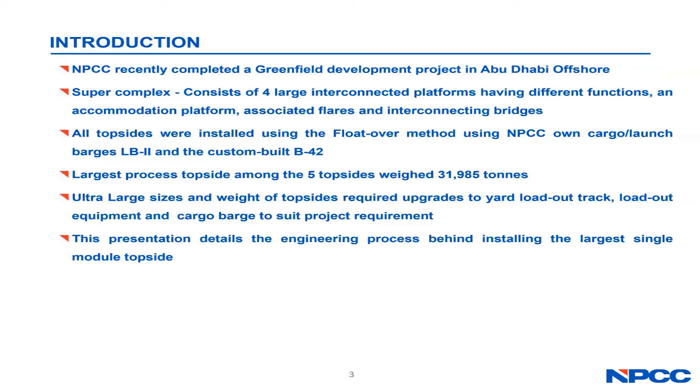Topside details. This process platform topside is an 8-legged structure. It consists of cellar deck, main deck, weather deck, and a cooler deck. Loadout weight of this topside was 31,985 tons, excluding approximately 1,350 tons of support structure, leading to a total moving weight of nearly 33,400 tons during the loadout operation. The size of this topside is approximately 72 meters in length, 81 meters in breadth, and 51 meters in height. This was fabricated at NPCC's yard in Musaffah, Abu Dhabi.

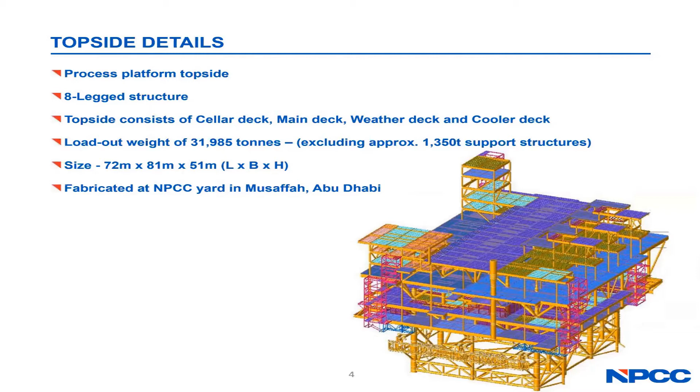Fabrication and loadout. From the early stages of the project, the fabrication location and orientation of the topside was decided. The jetty was dredged to accommodate the size of the new cargo barge with adequate underkeel clearance during loadout. The jetty was furnished with new larger bollards to take the loads of loadout and alongside mooring of the cargo barge. A new RCC skidway was designed and constructed to bear all the loads transferred from the topside during the loadout and weighing operation. These were covered by NPCC structural and civil engineering groups. A sketch of the pile arrangement along the skidway for taking the loads during construction and weighing operation is shown here.

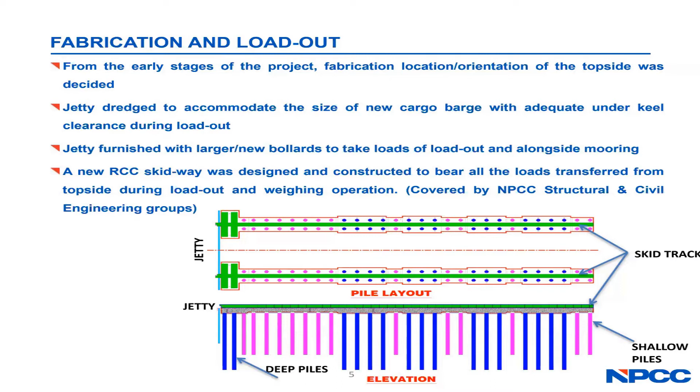Deck supporting aids. Topside is loaded out by skidding method. The topside is constructed on skid tracks that are laid in line with the RCC skidway and loaded out onto the barge along skid tracks that are laid in line with the bulkheads on the barge. Skid tracks are large stiffened I-beam sections laid on the yard and the barge, along which the topside moves. Topside is supported on 8 transportation nodes, resting on skid shoe structures that can slide on top of the skid tracks. Interconnecting trusses connect pairs of skid shoes to avoid misalignment during loadout movement. These are removed once the deck is loaded out and sea fastened on the cargo barge.

Design of all structures are covered by our structural engineering group. Skid track is designed on the cargo barge side, considering differential settlement and loads during transportation condition, to cover all critical scenarios.

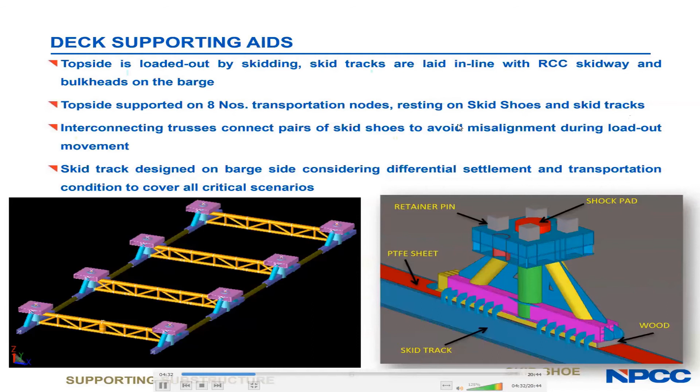Loadout. For the skidded loadout method, the topside is fabricated on a support system that rests on a skid track or rails and is pulled using a suitable mechanism along the skid tracks installed on the yard to that on the cargo barge. NPCC uses a gripper jack system for pulling the loads during skidded loadouts and has an inventory of gripper jacks of various capacities up to 800 tons, along with its hydraulic powering systems. Gripper jacks are hydraulic equipment that can move a load along a skid track by gripping onto the skid track and pushing or pulling using its hydraulic arms. Here we can see the gripper jack system being used to move a topside along the skid tracks during its load out.

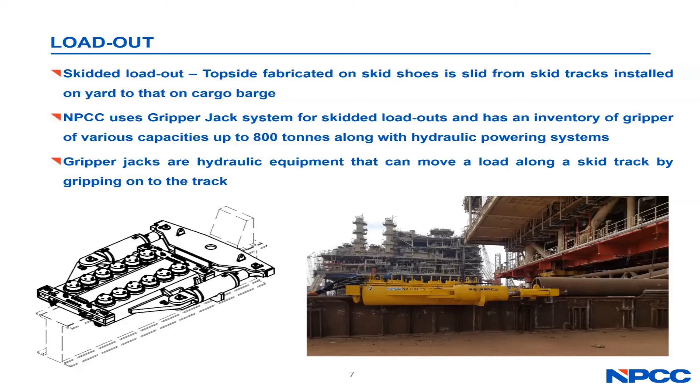All the components discussed in the last slide constitute the push-pull system for moving this topside from the yard to the cargo barge. Four 800-ton gripper jacks are connected to the skid shoes at both ends for pulling the topside onto the cargo barge, or in case of any emergency, to pull the topside back to its yard location. Link beams interconnect skid shoes on each row of the topside legs.

This sketch shows a general arrangement of the push-pull system. Gripper jacks are rated for a stroke of 800 millimeters every 4 minutes.

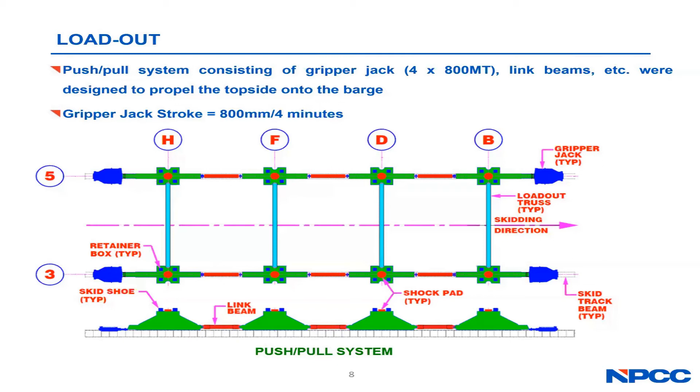Cargo barge selection. A cargo barge for a float-over operation shall have the following attributes: it should be suitably sized to carry the topside; capable of taking the loads imposed during load-out, transportation, and float-over operations; have fast ballast capacity with redundancy for load-out and float-over operations; meet the stability requirements; be capable of exceeding the load line if required during load-out and float-over operations; and it should suit the parameters of the NPCC jetty.

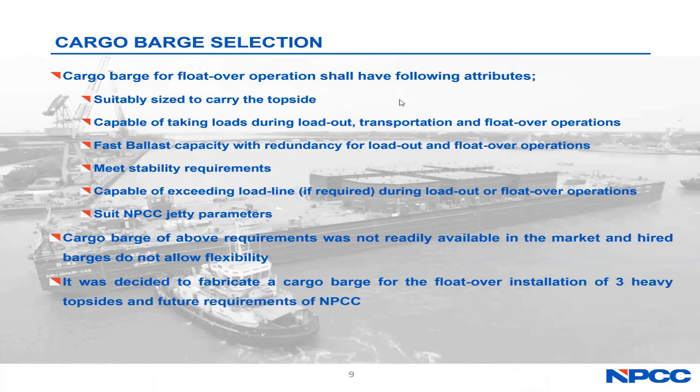A cargo barge fulfilling the above requirements was not readily available in the market, and hired barges do not allow flexibility in terms of hire times and project schedules. It was decided to fabricate a cargo barge for the float-over installation of three heavy topsides, considering the future requirements of NPCC.

It should have fast ballast capacity for load-outs and float-over operations with independent pump rooms. Optional size reduction shall be possible to suit different project needs. It should be designed with optional sponsons for increasing the load-out capacity.

Basic design of the cargo barge was performed by NPCC considering all the requirements and passed to the shipyard for detailed engineering. All preliminary studies for installation operations were carried out in-house to arrive at a size suitable for all intended operations of the barge.

Length was fixed at 180 meters, breadth at 42 meters for the main barge, and a 72-meter stern width including sponsons. Depth was finalized as 11 meters, and the structure shall be capable of submerging to a draft of 10.5 meters, which may be required for certain cases of load-out and float-over.

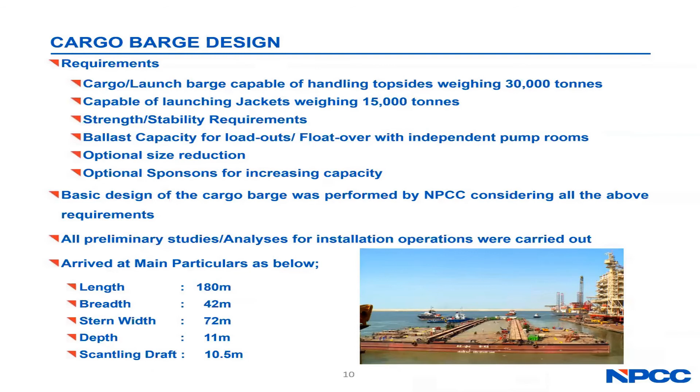Cargo barge design. The cargo barge sizing was made to suit the barge for both float-over and jacket launching operations. The breadth and depth of the barge was governed by the size of the float-over jacket. The length of the barge was a compromise between the ballast capacity and the longitudinal strength. Sponsons were added to the stern.

Barge is framed longitudinally in accordance with class rules. It is divided into 4 compartments transversely using 3 longitudinal watertight bulkheads. Additional 2 swash bulkheads are also provided. There are 9 main transverse bulkheads providing 8 sets of tanks and 2 pump rooms longitudinally.

Bulkheads are positioned so that loads during load-out and installation of heavy topsides and jackets act on strong points of the barge. Additional girder supports are provided in the midship region, replacing the longitudinal stiffener with a deep girder to facilitate hard point landing of sea fasteners for heavy structures.

The stern of the barge is strengthened for load-out and launching of jackets weighing up to 15,000 tons. The stern is designed for fitting rocker arms, which are special structures required during jacket launching, with a space between them varying between 16 meters and 32 meters. In order to achieve the flush deck in the stern rocker arm area, suitably designed removable covers are provided.

The area between the covers and the raked stern for rocker arms is designed as buoyant ballast spaces. Deck strength for removable stern cover units is the same as the original barge.

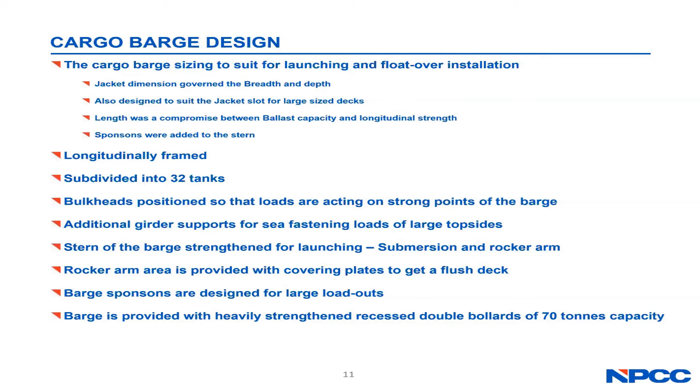The barge is provided with heavily strengthened double bollards of 70 tons capacity, which are recessed to provide a flush deck.

There are two under-deck pump rooms, one located towards the aft and other towards the bow. Each pump room caters to designated tanks, grouped as forward or aft tanks, and have localized valve control for operating these tanks. Two pump rooms ensure ballast efficiency, as a single pump room located either at the aft or forward leads to loss of ballasting speed or efficiency at the other end of the barge.

The manifold in the two pump rooms are also interconnected so that all tanks can be ballasted from any pump room for redundancy. Two pumps of 7,000 meter cube per hour capacity are installed at the aft pump room, and two pumps of 6,000 meter cube per hour are installed at the forward pump room. This gives a total pumping capacity of 26,000 meter cube per hour, one of the largest ballast capacities in offshore barges.

Two main diesel generators power the ballast pumps and the ballast priming systems, and two auxiliary diesel generators power the control, illumination, and ventilation system. One out of the two generators for both systems are for backup.

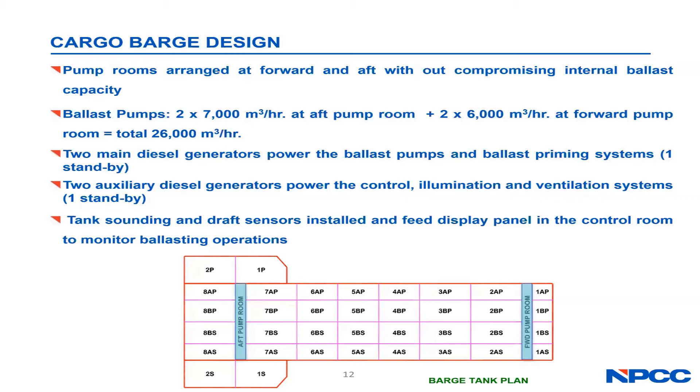Barge is fitted with tank and draft monitoring system. Sensors read the sounding of each tank and vessel draft at 6 points of the barge and transmit these values to the forward control room computer situated in the main deck forward area and a slave display in the aft control room situated in the aft pump room, which shall display the readings to show the status of the barge. Provisions are available to connect a remote display unit so that tank status can be monitored from jetty during load-out operations.

All main sea suction and ballast system valves are equipped with hydraulic actuators, suitable hydraulic power packs, and other components for remote actuation. All components of the ballast system are also capable of operating at local locations. The forward control room ballast control console has remote operation and indication of both forward and aft main sea suction and ballast system valves, pumps, and hydraulic power packs.

All tank air vent heads are marked and arranged properly at the forward deck area. This provides clear deck space without any vent head projections above deck to facilitate load out from the stern end and also from the sides of the vessel.

Construction of the barge was done by Cochin Shipyard Limited and delivered to NPCC in 2016. A positioning package was installed by NPCC Offshore Survey Group to assist in vessel positioning during offshore operations.

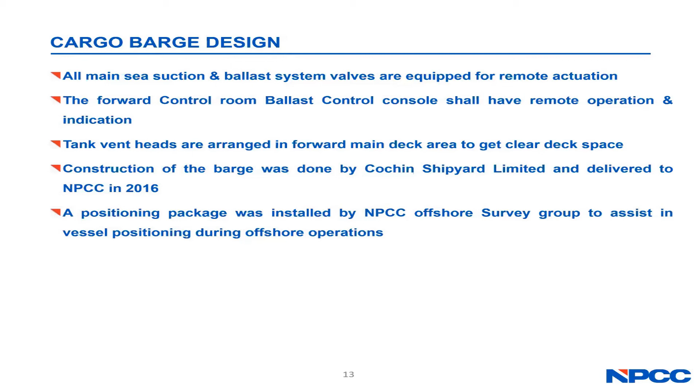Topside weight growth. Weight of the topside in the feed stage was roughly 16,200 tons, which grew to 20,000 tons at the bid stage. Not to exceed weight was set at 25,000 tons, and tender for building the barge was floated. However, considering the weight trend, NPCC decided the NTE to be set at 30,000 tons just before placing the barge order. During detailed engineering phase, due to a combination of factors, including changes to client requirements and equipment footprint increases, the weight of the topside increased to nearly 32,000 tons with significant COG variations.

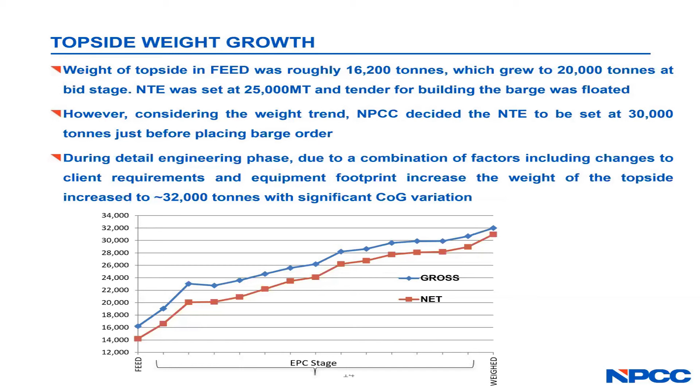Cargo barge recertification. Due to the weight growth and COG variation, the barge was recertified in 2018 for carrying a 32,000 metric ton topside. Hydrostatic and hydrodynamic model of the barge was developed in-house for recertification. Finite element analysis was carried out by NPCC Structural Engineering Group. We received approval from Classification Society for the increased capacity of 32,000 tons.

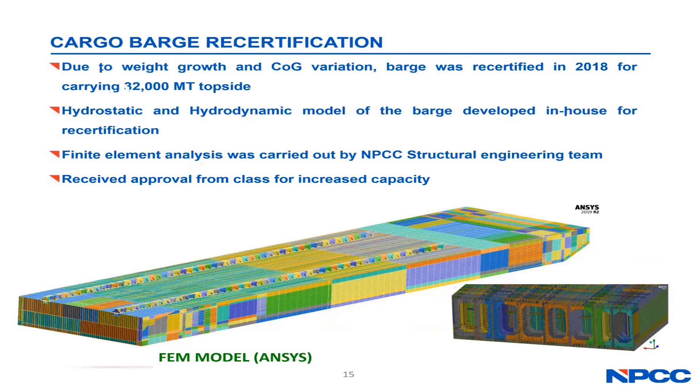Preparations for loadout operation. Detailed calculations are performed for all stages of loadout to ensure the structural adequacy and safety of topside, cargo barge, and loadout jetty. Ballasting analysis is performed to identify tidal restrictions on the operation. The topside was fully loaded on the cargo barge in less than 6 hours. Plans were also put in place for the retrieval in case the loadout had to be aborted and the topside had to be moved to its location in the fabrication yard.

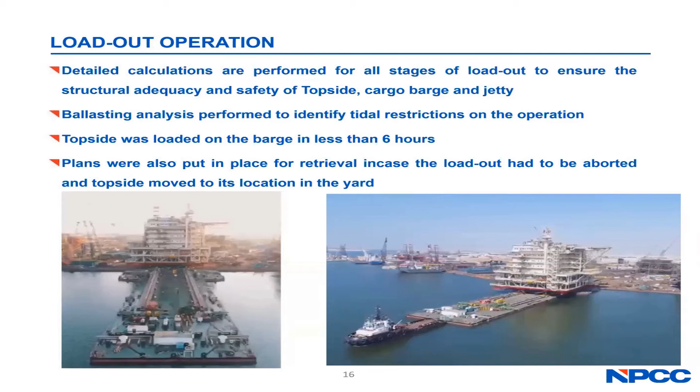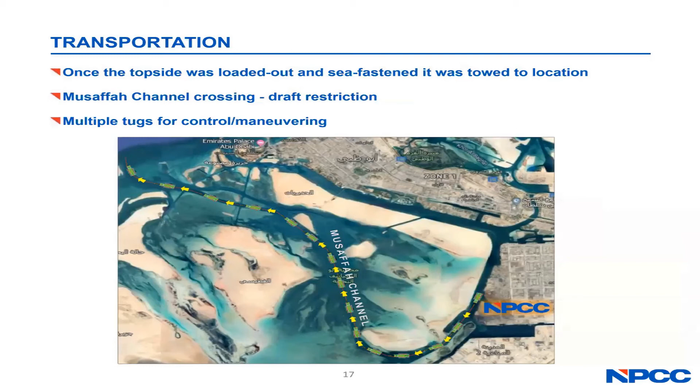Sea transportation. Once the topside was loaded out and safely sea fastened on the cargo barge, it was towed to its offshore location. Musaffah Channel has a draft restriction of 8 meters, and the initial transportation draft was adjusted to get adequate underkeel clearance for the cargo barge. The bollard pull required for the tow was also unusually high. A restricted weather window was utilized as agreed with the marine warranty surveyors. Multiple tugs were utilized for maneuvering the barge along various tight points in the Musaffah Channel.

Float over installation. This is an installation method for heavy topsides. The topside was installed on its pre-installed jacket. The jacket for float over topside is specially designed with a slot to accommodate the float over cargo barge. Mooring arrangement is carefully designed for positioning of cargo barge inside the jacket slot during entrance, load transfer, and retrieval phases. Various purpose-built installation aids are used to handle loads generated during the float over operation, and we will see them in the next slides.

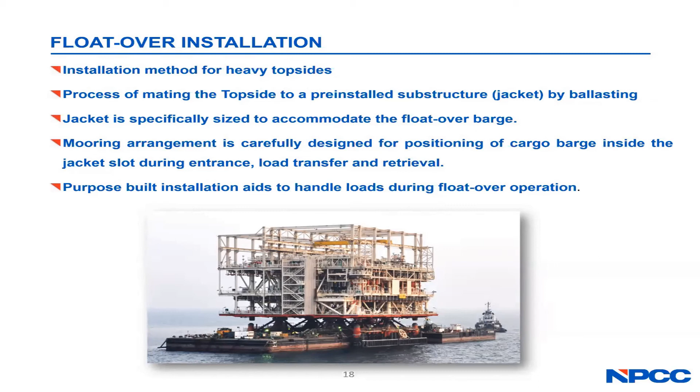Float over installation aids: three types of shock absorbers are designed and used for float over installations. They are the leg mating units or LMUs installed on topside legs, the shock pads installed on topside support structures, and jacket fenders installed on the legs of the jacket.

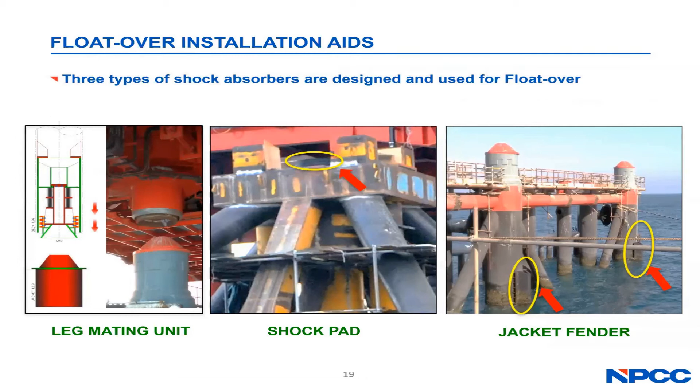Shock absorber leg mating units, or LMUs, are designed to absorb energy from vertical and horizontal impact of topside legs with jacket legs during the mating phase. Each shock absorber unit is composed of two sets of elastomeric pads: one set of rings to provide vertical motion restraint, and a second set of rectangular pads to provide horizontal motion restraint.

This is one of the largest LMUs used to date for this float over. The LMU was assembled in the fabrication yard and tested before integration. The elastomeric pads were supplied and tested by a vendor prior to delivery to match design specifications.

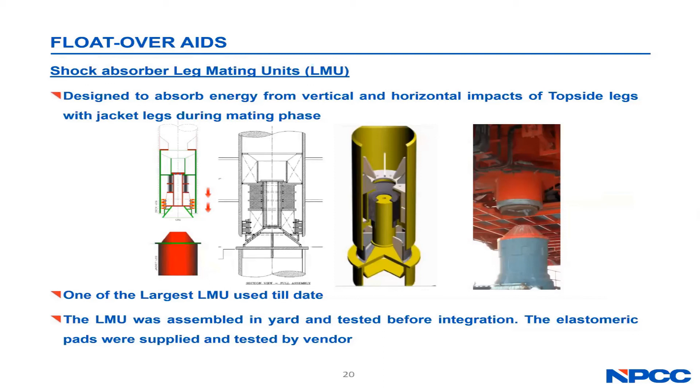Shock pads: during load out, transportation, and float over, elastomer support pads are used to ensure the interface between the supporting substructure and the topside structure. They are designed to allow some motion, absorb energy, and act as shock absorbers.

They are equipped with steel fixation plates, which can be welded on top of the deck support frames. Design requirements of the elastomeric components were specified by NPCC and manufactured, tested, and supplied by a vendor.

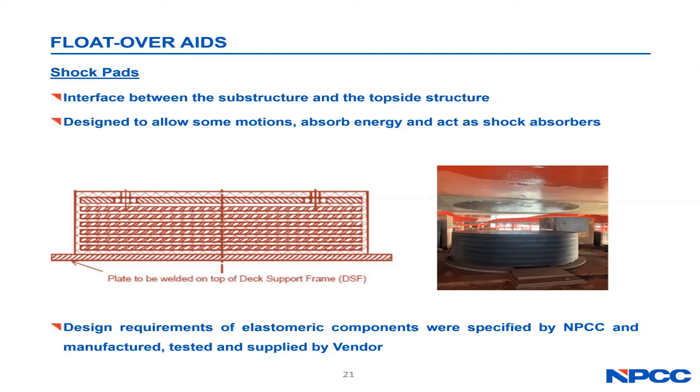Jacket leg fenders are mounted on the internal side of the jacket legs to absorb lateral motions of the barge when it is in the jacket slot during float over. Two entrance fenders are additionally added on the first two jacket legs to protect the legs and the barge during entrance.

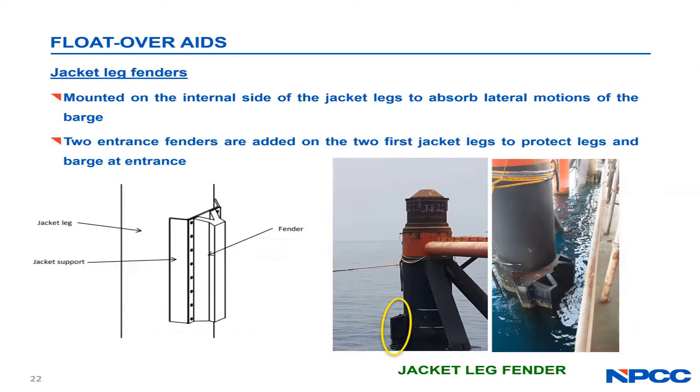Finally, we will look at the different engineering analyses performed for float over. Float over ballasting and tide restriction studies are performed in detail to ensure barge capacity to enter the jacket slot, install the topside, and safely exit within the required tide range, and to identify tidal restrictions. A micro schedule of operations with an expected tide cycle is shown below.

Barge longitudinal strength analysis is performed for all stages of float over so the barge structure is not overloaded by bending moments or shear forces occurring during float over. Clearance checks are performed to identify restricted areas for float over installation and to identify any clashes with equipment or structures.

Float over mooring system analysis is performed to ensure the adequacy of the mooring system used for positioning the barge during float over operation, and to ensure that mooring loads do not exceed the allowable limits of the jacket legs.

Float over impact load analysis is performed to assess the impact loads on the jacket and topside due to barge motions. This is performed for all float over phases from all directions: head, quarter, beam, and stern. The phases are designated based on the barge location, or topside load transferred to jacket leg through LMUs.

Each direction is analyzed for corresponding wave heights and three wave periods. A total of 135 cases of 3-hour simulations are performed to cover the entire float over operation.

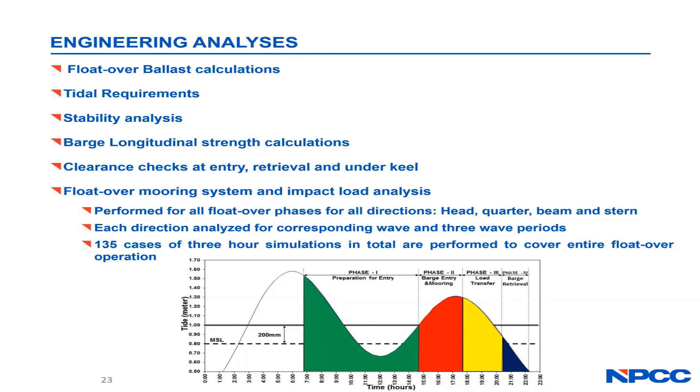The results from the analysis include motion of the cargo barge, jacket fender loads, deck support shock pad loads, LMU shock absorber loads, and mooring loads. Maximum loads are used for structural design of the jacket and topside. Typical time history plots from the analysis are shown below.

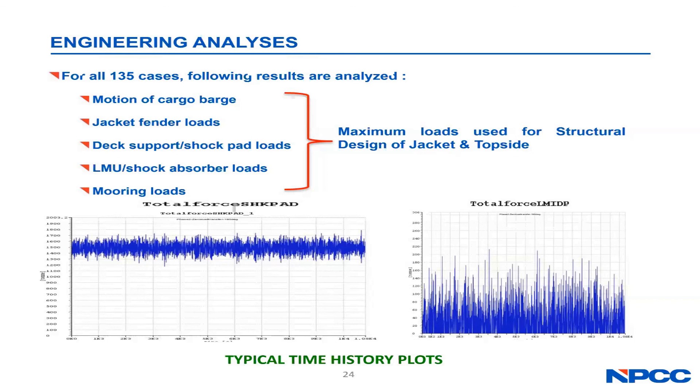Conclusion: we have gone through the different aspects of executing a large topside installation by the float over method, utilizing a purpose-built cargo barge, which demonstrates the in-house engineering capability of NPCC.

The carefully thought out design of the cargo barge was instrumental in handling significant weight growth of the topside. The design and construction of the cargo barge was completed within the project duration, and the barge was available at the scheduled ready for load out dates of the large topsides.

Due to NPCC's proven track record and experience in float over installations, management was able to take proactive steps to add facilities for such installations, thereby boosting the capability of the fabrication yard. Hence, NPCC was successful in achieving the Guinness record for the heaviest single module topside installed on a fixed steel jacket.